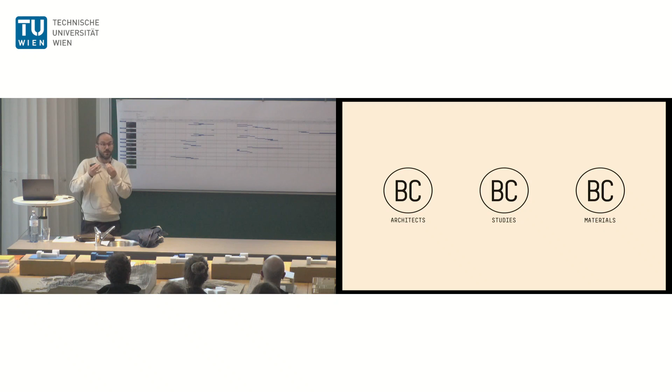Nowadays it's actually 3 practices, 3 companies, 3 legally different entities that we needed to create in order to practice architecture the way we wanted. Currently we have 15 to 20 persons working at BC Architects and Studies. BC Architects is an architecture office specialized in bio-sourced, geo-sourced and urban-sourced materials - circular building. BC Studies is a non-profit organization where we do projects abroad, non-profit projects, and organize workshops to experiment, learn, and teach about sustainable solutions. BC Materials is a cooperative that doesn't sell services, but sells building materials made of earth, mostly coming from excavations from the cities.

I'll start by explaining our vision of architecture. I think it's clear that there's nothing really new in what we're doing - it's actually looking back at how we used to build. It's always been common sense to work with scarcity, with a lack of materials, because it was complicated to transport, so working with what's around you was normal, and we're going back to that.

I like to illustrate this with an example: the vernacular architecture from Flanders, this specific region in Belgium. This specific barn was built by a farmer using the wattle and daub technique - a wooden frame in oak filled with earth mixed with straw, built next to his land where there was cultivation.

This specific farm was disassembled a second time when it wasn't usable anymore or there was no possibility to grow more. It was disassembled two times, and then even a third time to go to an open-air museum called Bokrijk in Flanders for the World Expo of '58. So three times in a row this wooden oak structure, which was super strong, was disassembled.

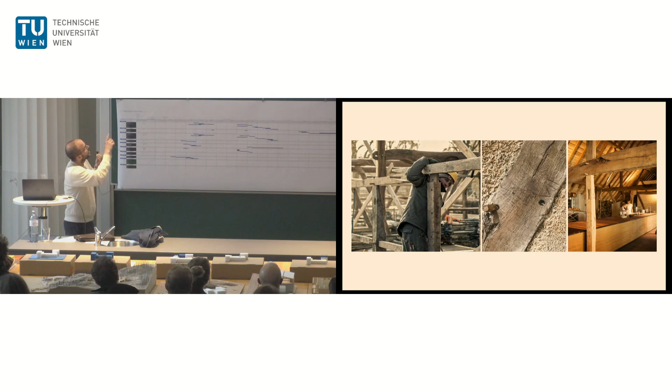The earth infill was just thrown away in the neighborhood - it was actually compostable, no waste in it - but the valuable elements, the oak beams, were reused. You see it here well because we disassembled it as a BC Architects, Studies and Materials project to refurbish this barn in the open-air museum, transforming it for this fourth life into a bakery. All the beams are numbered and attached by this kind of pin connection. For us it was interesting to see there's nothing new - this open frame structure, then refilling it.

This time we didn't fill it with earth anymore, but with hempcrete, because we needed a volume that was insulated, where you could keep the heat better. I like this example because it shows that again, it's not really new.

So with BC, what we try to do is first to think about the project. Is this really necessary to build? To say no to a project is sometimes the most sustainable thing you can do, because then you don't build, you don't need any materials. Then of course you look at sharing, reusing, and renovating. And if you want to build, then you build through geo-sourced, bio-sourced, or what we call urban-sourced reuse of materials. These are the principles we try to apply on every project proposal we receive.

And how did we start? Well, it was more than 10 years ago, 15 now I think, with my 3 best friends who are the other co-founders of BC. We were studying and received this great opportunity to go to Burundi just after graduating, with the idea that we would manage to build something finally, a library. So it was quite a project of a certain scale.

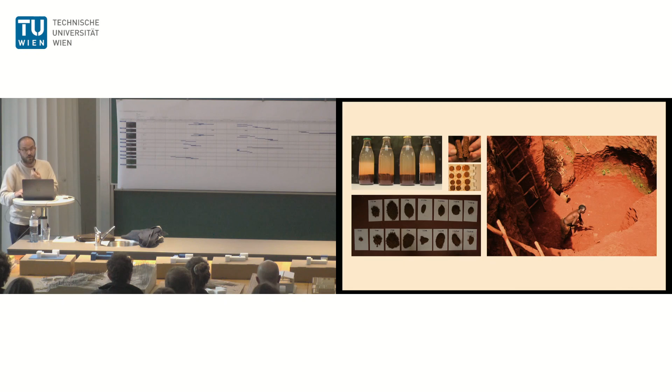This is how we discovered the work of CRAterre in France, where I later studied in a postmaster. We discovered there isn't only millennia of knowledge about earth and construction, but also a lot of modern science and construction literature about how to reformulate and make earth mixtures better and more durable.

The crazy thing about this project is that it was done in a completely different way than a project we'd do in Belgium. It was done with a lot of trust, because we had no building permit, no general contractor, no tendering, no contract - everything was done on trust. We had a client, but we also had the money, so we were also a bit part of being the client. I think no one was very clear on their role, but everyone had the same goal: to make sure this building was done well.

And then after this project, we discovered that we didn't teach anything. We were like super young architects, but we learned so much from this experience. And in a very naive way, we took it back, and we went back to Belgium with it, and we started to try to apply those principles also on our projects in Belgium.

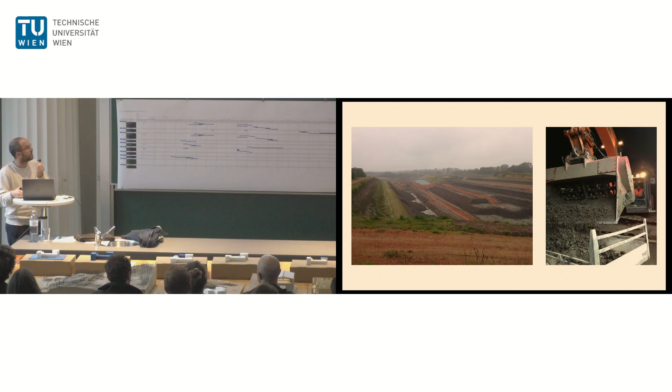So we went a bit further. We went to visit different quarries in order to find resources to make bricks. And then we started to test them, to make prototypes, to convince everyone that it would work.

Again, it was complicated to do all this prototyping or ask for extra money to do that, so we organized workshops in order to gain some time and extra money to make all those researches. We had to prototype because people were not really sure that it would work.

On earth masonry or any earth techniques, you don't have norms in Belgium. We're using the German norms, the DIN norms. Sometimes we can use them, but most of the time they are not usable in Belgium. So we had to prove that it was working.

And then in order to make blocks and to do this insulation in hempcrete, we had to organize workshops. It was a bit like a win-win situation, because in Burundi, we could hire 60 people to dig and make bricks. Here it was not possible.

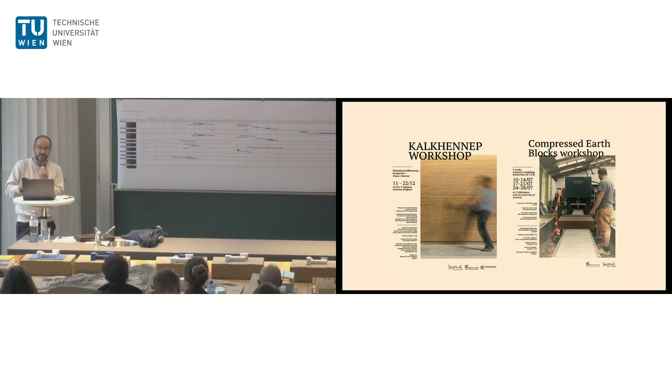So here we created this win-win situation where people would come to help us by participating in the construction site, and at the same time we would learn together the principles about earth construction and this new type of material. It was very interesting, because then you create a community, something that we also had in Burundi. This community was present, and you start to feel that by creating this workshop, you also make a community of people interested in making change, making an impact into architecture.

And so this is how we did our first mass production - not really mass, but a production of 20,000 blocks in situ - that we produced, not anymore with a hand press like we had in Burundi. By the way, if you go on YouTube, you can see videos of how we made the bricks and materials in Burundi, but also specifically for this project.

So we evolved a little bit there. We had these electric machines, hydraulic presses, in order to make better bricks, but to create them on site during these workshops. I will not show the video, but I invite you to have a look at it - it's nice to see.

But then, by doing this, we call it this type of bespoke project, tailor-made project. So we did it for our own architecture project, and started to do that also for other architects that wanted to build with the local earth. So we started to do also some consultancies.

For example, there is a project in rammed earth, like a watching tower in Flanders in Belgium for the Gouden Lineal, and we helped a few architects also to build with rammed earth, to reformulate the earth. So we gained this expertise in what we called reformulation: characterizing a certain type of local soil and then adding gravel or sand or this kind of resources that are missing in order to make building materials.

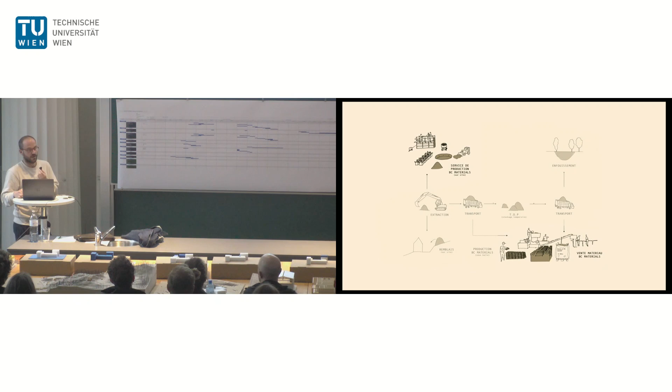And then you can ask yourself, yeah, but this earth, what is it actually? Is it not polluted? Is it usable? Well, the good thing about Brussels - and this is research we did over a few years - is that we discovered we have a lot of virgin soils that never saw the light.

For example, here on the higher ground in Brussels, in Uccle, they're digging, for example, to make a few layers of parking lots. And then they find this Brussels sand - a virgin sand that never saw the light, and that is perfectly usable.

Why isn't it used now as normal sand for making concrete? Because there's a bit of clay in it, and it's too much work to wash them. It's been done in quarries, but they don't like to do that with the sand coming from the cities.

Of course, to make bricks or materials, you need not only sand, you need a binder. In our case, we are not working with cement or lime as a binder, or any firing process to bind the material. We're using clay, raw clay, in order to bind our materials, so we need that resource too.

And here, for example, when you go a bit lower, 9 meters depth around the canal area, then you come to this Ypresian clay that we're also using as a binder. But there are different types of clays that we use to make our materials.

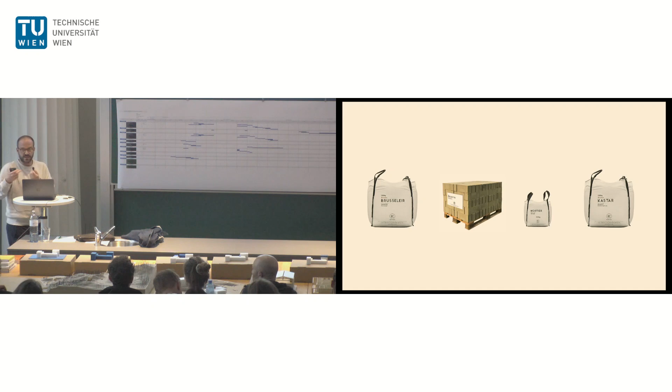Those are conditioned in typical bags ready for the contractor to use, to make it as simple as possible and to have another solution. This is the product portfolio we have for the moment: different types of blocks, different colors of plasters, and also the byproducts you need to fix earth plaster, seal it, and maintain it.

We produce that in Brussels, next to our architecture office. We have this workshop that we built in a circular way, because we're not sure we'll stay there for long. So we had to build it so we could disassemble it and reuse exactly all the components to go to another place.

As you see, you have those loading bays there. The ground worker comes and fills those 3 loading bays with the 3 resources I was explaining. Then inside we process them — sieving, mixing, all activities done with electricity, so there's no firing process.

If the transport is close, and that's what we try — we were operating in Brussels with resources from Brussels — then you have a zero carbon material, almost zero, I would say.

But of course, earth construction is something that's quite forgotten. So it's important to see that it's just as important to create a certain offer for the market. We have to educate, so we organize a lot of workshops for architects and contractors to learn how to apply these materials. We see that this is actually as important as creating good materials.

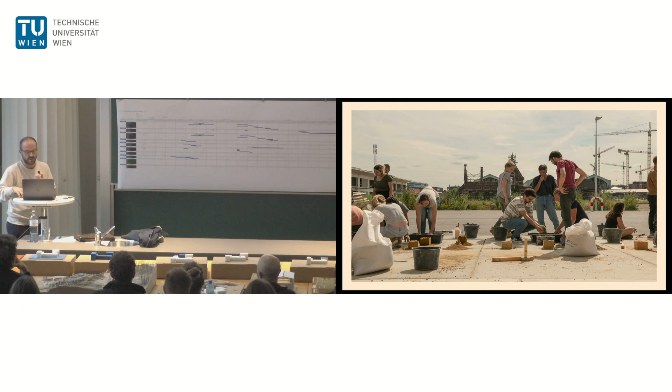I will explain also 2 projects that try to illustrate a little bit what we are doing. There's one project we did with BC Architects and Studies and Materials together with Assemble and Atelier Luma for the Luma Foundation. I think many students already went to visit it, and they're in the room now.

And then another project, a research project that we're almost finishing right now, called UTUBE — it's a BC Materials project, but more on a research basis, to see what we can do with the excavations for Metro Line 3, a new metro line coming in Brussels. This is a very interesting project for us, because it helped us understand the potential of earth in our growing market.

In Brussels we'll have a new metro line coming, so there will be not 2 million tons of earth excavated next year, but probably double that. The clients asked us to look at how we could think of revalorizing these kinds of soils coming from the excavation in order to make building materials.

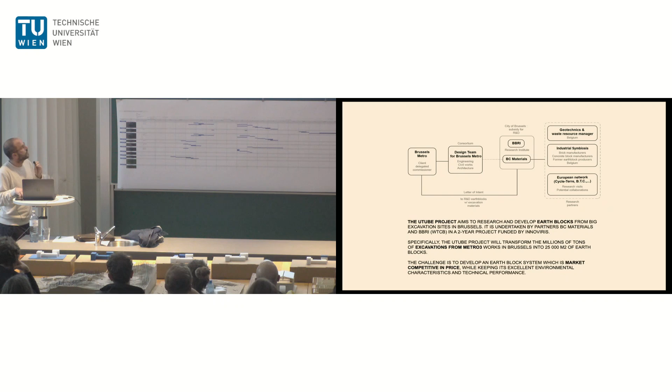The first thing we did for this project was to look at how they're going to be excavating the earth for this construction site. We quickly saw that reusing the earth coming from the tunnels would be difficult, because in order to drill the tunnels they have to pump a certain additive that is actually clay, called bentonite. This pollutes — not really in the bad sense — but it changes the properties, characteristics, and granularity of the earth, making it more complicated for us to reuse the earth coming from the tunnels.

It's also full of moisture and water, so we discovered it was easier to use the earth from the digging of the stations, because that's another way of digging and taking the earth from the soil. But still, there's a lot of potential in that earth.

Then we started to characterize it a bit, the same tests we did in Burundi but at the next level. Together with the technical institute and the labs, we characterized all the different places where they would excavate, to prepare ourselves for the big excavations and know: okay, here we have this type of soil, if we mix it with this, we can get this mixture, and then it can make this type of brick, for example. So we collected samples from all the different metro stations that will be dug in the coming years.

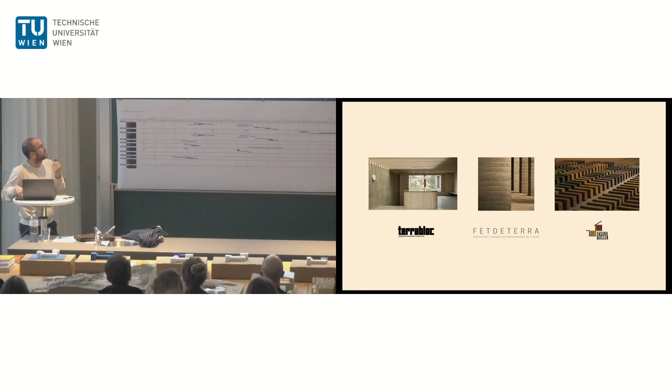You see the color is different, and the properties are also different. But what we quickly discovered is that many of the fired brick factories in Belgium are actually already producing earth blocks - so for them it's nothing new. Before going into the kiln to be burned, they're producing unfired clay blocks at a very high production scale. So we saw there is actually a lot of potential.

The only thing left was to work on the mix and figure out how to commercialize that. So we went visiting almost all the factories you could imagine in Belgium to see what the possibilities are and how open they are to working with us, because that's another challenge when you arrive as a young entrepreneur architect saying, look, we'd like to make low carbon blocks with excavation material from the subway in Brussels.

They look at you and they say, yeah, sure. So that's also part of the work, to be convincing and to show that there is something there.

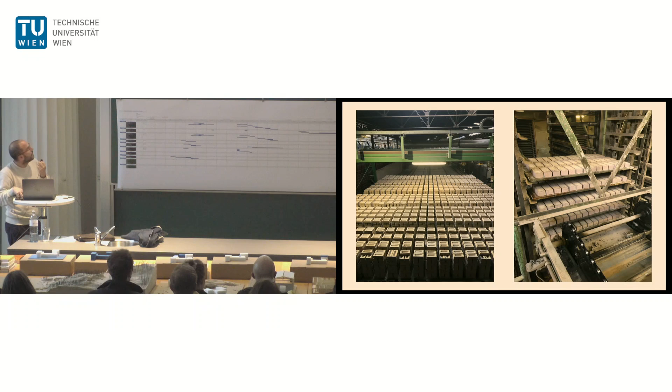That was amazing to see, because the difference in production is crazy. I was explaining the 8 tons a day with 2 people. We went visiting factories where they produce around 150 tons with 1.5 people for 1 hour of work. So the scale is completely different, and then you can start to think about

making the bricks more affordable and actually being able to reach more people. This one is also interesting, because it's a concrete block factory, not a fired block factory, and they have very interesting machinery. The system we had used compressing, well, they have a vibro-compressing machine, and they're also perfectly able to be used and to think with. So now we started a collaboration with two companies, one making molded earth blocks like on the previous slide, and this one making compressed earth blocks.

But of course you're losing a little bit of this hyper-locality, losing also the fact of being completely CO2 neutral, because we have to bring the earth there, and then bring back the finished materials a bit further. So that was a very important point in choosing which factory we wanted to work with: how well connected are they to different types of transport. Here, for example, they're close to the water, to the canal, and that changes a lot your result on the life cycle analysis, on the carbon footprint of your materials.

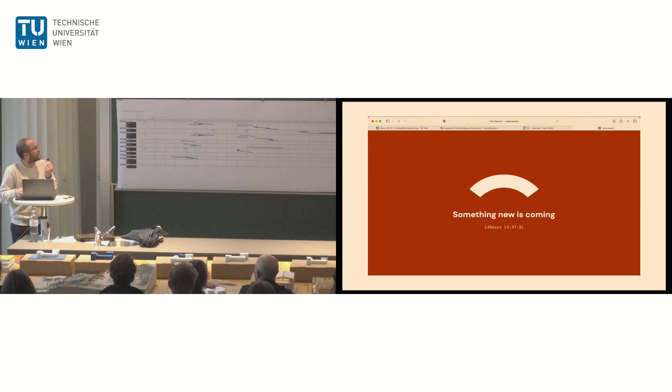So this, and I will finish now with this project. I hope I still have a few minutes.

So this previous project, this research project, led us to think about how to make earth affordable, to sell it to more people or to bring it to more people. It's not about selling, it's about actually bringing it, because our BC Materials is a cooperative enterprise, and in the status of our enterprise we wrote that our mission is to bring earth construction from a niche market to a growing market.

So we felt that to create impact and reach more people, we had to become a bit more mainstream, I would say, or to also lower the price to make it more affordable, and not to be only for the lucky ones.

We were talking today during the juries that, for example, rammed earth is a very, very interesting material, but it embraces a lot of craftsmanship, and so in countries where labor is expensive it costs a lot of money. Most of our clients that can afford rammed earth are super wealthy. It's always funny to see that this earth can be used to build in Burundi for people who earn €1 a day, but then on the other hand you have earth sold for 1,500 to 2,000 euros per square meter. But that's okay, I think it's important to see that.

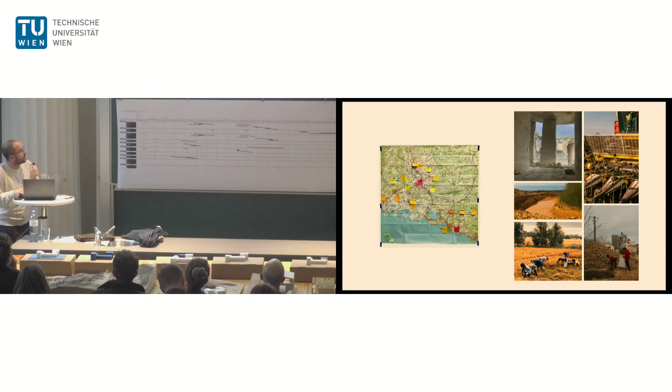For example, you see above, we went visiting different stone quarries, sand quarries where they have this waste. Most of the time in sand quarries they wash the sand, and then you have the waste of the sand, which is actually a clay muddy earth that has been dried and not used - so that was interesting to use as clay. But also the rice straw and the sunflower.

What was nice with this project is that Assemble Studio was in the UK, BC was in Belgium, based in Brussels. We had to work together and find a way to do it, so we worked a lot through residencies. We would go there for a week, two weeks, designing together, prototyping together, and then building small exhibitions in order to move forward. Those intense moments where you're all together, feeling a bit like a community, were super important to work together.

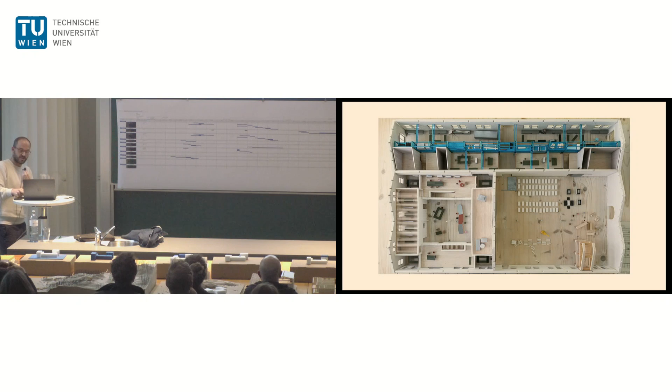And so it results in the end in this plan. You have the existing shed divided into 3 blocks, where above you have the longitudinal workshop room, and down you have more the ateliers. The models were also super impressive in order to take decisions and try things out - a lot of models on different scales, going to prototyping in order to make decisions and see what would be doable or not.

You see the construction site of the wooden element, inside the construction site - and by the way, in two weeks the official opening of the project is happening.

And here you see the production of those bio-based materials with the rice straw, making acoustical panels. The whole existing stone building was insulated from the inside with rice straw, placed by local people there, an association.

And then here the different prototypes of the rammed earth. BC Materials was on a mission to work next to BC Architects and Studies to also create mineral materials. So we actually did some rammed earth, the mortar for the rammed earth, compressed earth blocks, and the mortar for the compressed earth blocks, plaster, an acoustical plaster and a base plaster - all with resources coming from around.

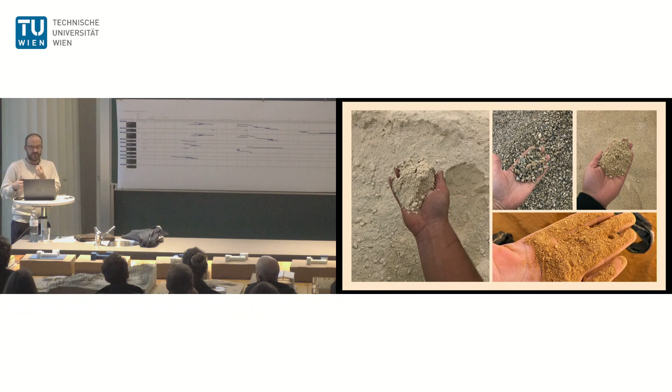One of the main resources that was super interesting to work with was the stone dust from the quarry of Saragon, because there they have this really beautiful quarry that looks like a cathedral, where they cut this white stone, and on the floor you had a lot of this stone dust. This became the base ingredient of everything, and that's why you have this white color in the rammed earth and in the bricks - but it's actually not really common for rammed earth and compressed earth blocks.

Of course, we had to do a lot of testing to prove that those materials were good. The good thing in France is that you have norms about rammed earth and compressed earth blocks that we could follow to prove to the engineers and control bureau that it was up to standard and strong enough, even though it was unconventional, so the risk wasn't so great.

We were also super happy to work with the best contractors. For the rammed earth, we worked together with Atelier Cara from France, which was great. In the south of France especially, there's a lot of capacity and a lot of people who are very good at earth construction.

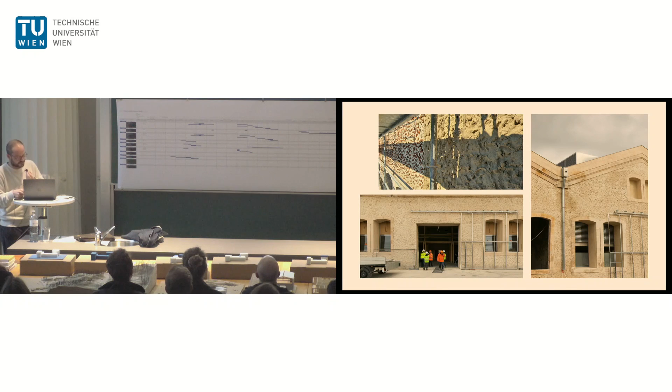Here you see the reuse of the clay tiles from the roof, which were reused for the floor, as you see in the samples on the left, and also for the facade to create this crunchy plaster around the whole building, with these pieces of crushed tile, and these beautiful cross-section tiles that became the terrazzo floor.

Here you see the production of the blocks. BC Materials didn't produce the bricks and rammed earth themselves, which is something we could have done by bringing our own machinery. Instead, we trained a general contractor specialized in concrete to mix the rammed earth mix themselves, which we had pre-designed and reformulated.

Here you see the inside, with this whitish color, the plaster also applied on the straw bales inside, so you don't see the straw bales anymore.

We also researched something really interesting, though the research ended up not being used, although I think now it's used in one of the blocks. We tried to make finishing earth plaster with algae as a binder. We discovered that the algae, spirulina, doesn't just work for coloring, but also acts like clay to bind sand together. That was really interesting, giving a nice color, although it reacts completely with UV, so it changes color.

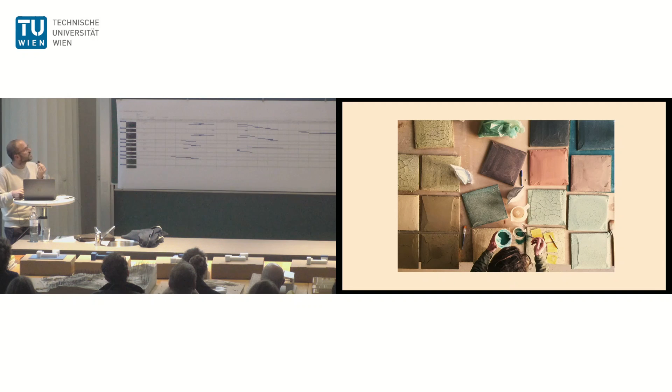But when you have an artistic client, they like that too, so it was okay. What didn't work well was the smell - when it gets wet again, it would start to smell. So we stopped the research for a bit, but now we've found a way to get rid of the smell, so it's used as plaster in a few places.

Here's the construction site, spraying the earth inside. It was super nice to work with all those local resources, and also with all those local, super skilled contractors, and that's what makes this project very interesting, I think - it's on a human scale.

There was a lot of exchange. We were also lucky to organize a series of workshops during construction - not to lower the price or get free labor, absolutely not, but to exchange knowledge and show that these unconventional materials have a lot of future in building. I think we reached around 100 to 200 people through the different workshops, one on fibers, one on earth, and one on straw bales.

Here you see the fiber workshop, and that's it.

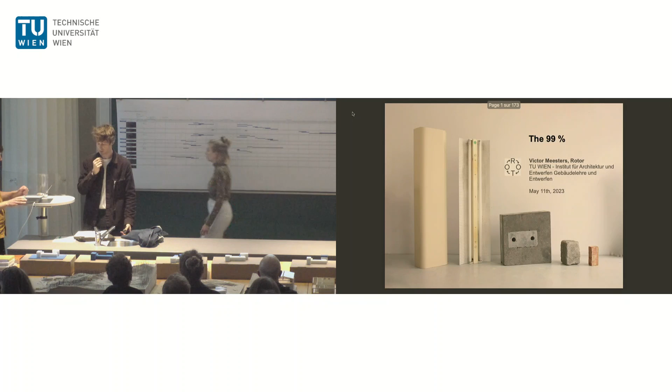I'll briefly introduce Rotor, which is actually two departments: Rotor itself, plus Rotor Deconstruction, founded later. Rotor as an association was founded in 2005 in Brussels, and since then has debated questions related to resources, waste and obsolescence in the building sector through applied research projects, exhibitions, conferences, and impressive publications. Some are here up front, so please take a view if you have time.

In 2013, I believe, you curated the Oslo Architectural Triennale. Then in 2014, Rotor Deconstruction was opened, which concentrates more on actual building audits, looking at existing buildings and auditing them to reevaluate components, then rework these components and take care of all the logistical issues. We'll be hearing all of this later on.

A couple of years ago, I was able to travel with my students to see you, Victor, in Brussels, to actually see what this meant in reality—large storage areas, the whole logistics of maintaining and deconstructing, and how that truly works. I think that's very valuable for all of us here today to really see how that works.

I'll also briefly introduce you, Victor, because you've been heavily involved in FCRBE, which was founded a couple of years ago, 2019, which I think you will probably show us.

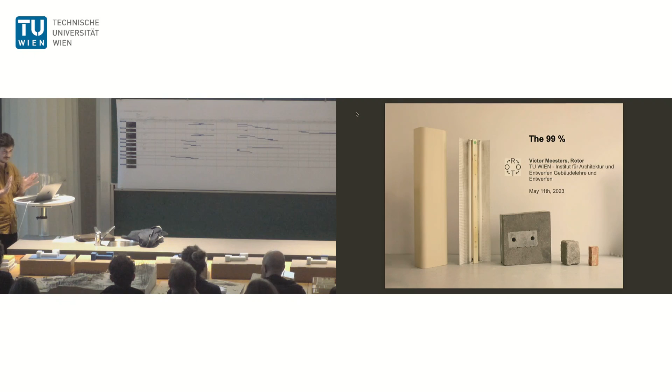There's a nice image, voilà. So yes, I joined Rotor 10 years ago. After my studies—I studied landscape architecture and architecture in Paris—I ran a small association called Sixième Continent, dismantling exhibitions and trying to build something with reclaimed elements. Then I met Rotor 10 years ago because I wanted to do an inventory of all the reuse dealers in France, and it took me almost 10 years to achieve this goal. So now I'm at a cross-section of my life because I checked this box.

Tonight I'm going to give you an insight into what we are doing at Rotor. It's not all the projects—there won't be the exhibitions that some of you may know us for, though as Gordon says there are some books about these exhibitions. But I will try to give a really pragmatic talk about how to reclaim building elements.

Gordon already said everything about Rotor, and most students know it. We are a team of 30 people—this picture was taken a few years ago—based in Brussels. And me, I'm always like the black duck, I don't know if we can translate this in English, because I'm here in the middle of the picture, but in fact I wasn't here. It's like a collage, because I'm always in Paris, steering a small office in Paris for Rotor.

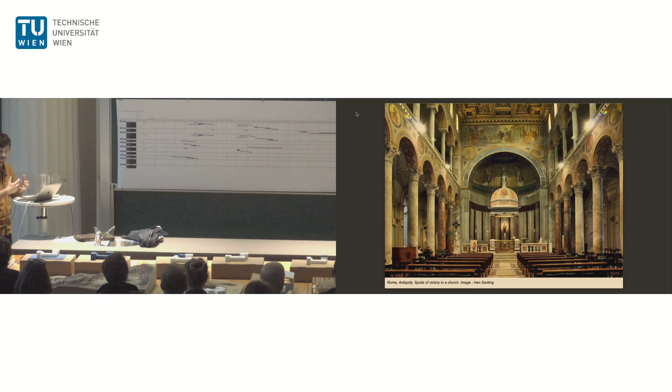We found through archaeological studies that there was an existing market for second-hand materials during the Roman Empire, like selling tegula and imbrex, the tiles on the roof. Also in Pompeii, we found that much of the marble bar - the club of that time - was made from the reuse of marble tiles from the nearby palazzo. It's called a thermopolium.

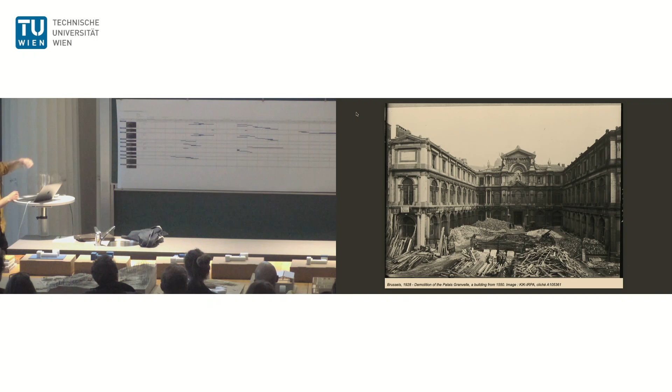This is an image of a demolition site in Brussels in 1928. It looked a bit like a recycling demolition site with piles of materials well stored - piles of cobblestones, wood - except if you look carefully on this billboard, you'll see 'material to sell on site,' proving that less than 100 years ago we were still selling materials on site, and all materials were dismantled to be carefully sold.

So there are a few reasons. One of them is the evolution of tools. During the time of Achille Picard, they were using hand tools. Then with the two wars, we got tools that made it easier and faster to knock down a building. So you earn money if you demolish quicker nowadays, or if you build quicker.

Also the cost of labor rose over time. Deconstruction is labor intensive, maybe like 7 times more than demolition practice. So these reasons changed the demolition practice to the ones I showed before.

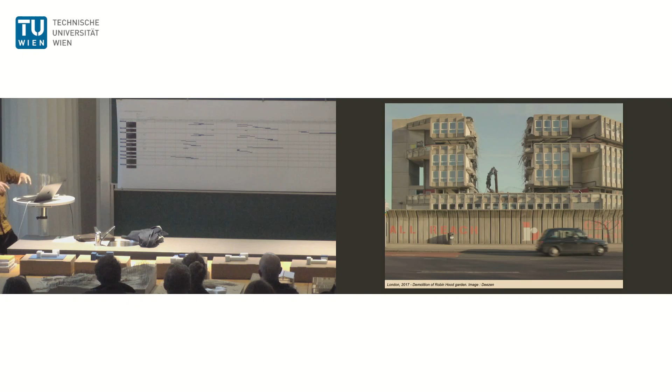And then after the 1970s, we changed our demolition practice to recycling. This is a demolition site - maybe you know this famous building in London that was knocked down in 2017. We start to strip out the building to sort the materials and crush the concrete to make new raw material.

So when we talk about recycling, we're talking about crushing materials or melting materials. And we all know how disappointing this practice could be - a great loss of value, or great loss of energy embedded in this element.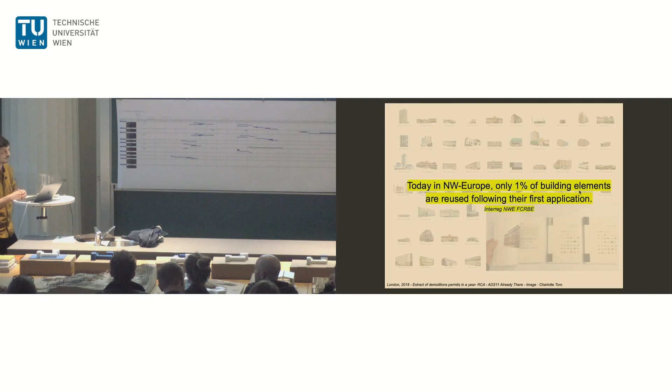So the question is how to facilitate the circulation of reclaimed building elements. Now I'm going to propose a small exercise to warm up a bit.

It's an exercise I took from Dennis Meadows - you maybe all know this guy who wrote the Limits to Growth report in the 1970s. It's an exercise to interrogate our habits. So please cross your arms like that.

And look which hand is on top. Now uncross your arms and try to cross in the other way, in reverse. How do you feel? Good? Difficult? No? Not natural?

Yeah, it's hard, I know. It's hard to change your habit. And it's the kind of feeling you can have when you start to build with second-hand materials in a world where everything is made for new materials. But trust me, if you try every day to change your hands like that, to cross them the other way, you get used to it. So this is the good lesson. At Rotor, we try to make tools to help you not have a nausea each time you change your habit and build in a different way.

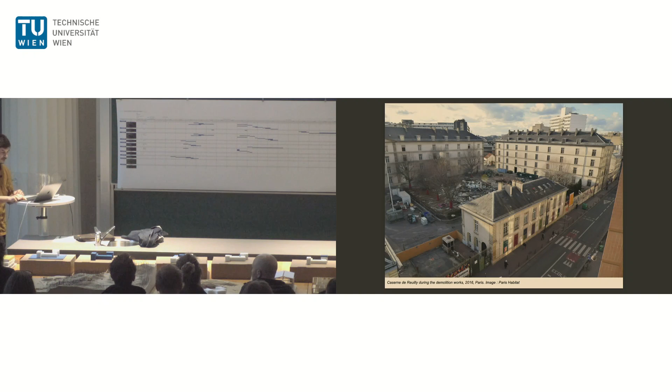So I'm going to present a few tools at a few critical points of the project. The first question when you want to reuse building elements is about the assessment, how to evaluate the potential of reuse. You have a site like this one in Paris, a former military camp transformed by Paris Habitat into social housing. You want to evaluate the potential of reuse on site for these building elements.

So the first thing is to do a listing, like the students did here, a listing of all the building elements. But an element that can be dismantled is not necessarily an element that can be reused. There are more criteria to take into account.

Like for instance, is there pollution, toxicity, like lead or asbestos, the quantity of materials - if it's only 2 square meters, it's not going to be really interesting. The state of wear, is it in good condition? The price on the market versus the price new. Is there an existing reuse actor? The phasing of the building site, if you have to remove it quickly, the accessibility. So all these criteria are required to evaluate the potential of a reuse element.

There's no reuse actor, meaning no market or business market for this element, but there's a large quantity and good quality of materials, so we can do something tailor-made on site, for example. And then the anecdotic category. This is like an image of the information we need to communicate to the actors of the project, because as designers, if we don't show the information, we cannot manipulate it.

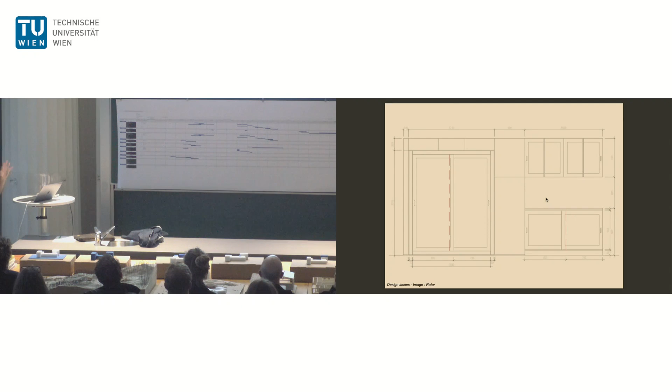The question of renovating this cupboard - the first question is about the surface treatment, how to sand it, how to treat it. So we did some processing tests. Then the design, because they are not square, there is bending, etc. So you need a design that accepts this element in new furniture. And we did some mock-ups that the architect put in his project.

Same thing for this toilet partition. It's a kind of Trespa panel, really high quality - it resists high temperatures and numerous chemical products, so it's really hard, with a really long lifespan. But the environmental impact is really high for this kind of material, so you have to reuse it. In fact, it's a good board for carpentry, so we designed a stool.

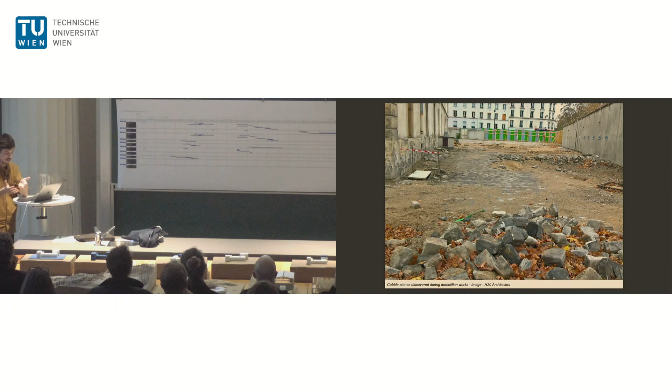So we upcycle, as we say - we give more value in furniture than in a panel. With the CNC, we cut these panels and create furniture for the cafeteria. Everywhere in Paris, under the roads, there are these kinds of cobblestones. So we discovered that the city of Paris has a platform where they cut and treat these cobblestones.

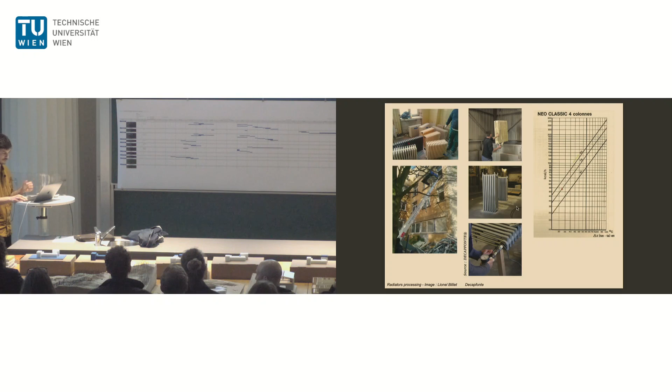So they were able to cut them and have a plain road for pedestrians and a rounded one for the garden. Same for the cast iron radiators. There were 300 pieces, and there's a reuse market for it with a high level of service and a warranty of 10 years. We were astonished discovering these traders, and then they put them again in the project with the new hardware stuff. It could be a nice story, like everything is reused.

But in fact, really few of what I showed you were reclaimed because of the organization on site. For example, these sanitary items were damaged during the deconstruction, so we cannot reuse them. This lamp was meant to be transformed with an LED system, but the engineer didn't accept it because he couldn't calculate the reflection of light of the abat-jour.

This railing was dismantled to be transformed into urban furniture, but the company sent this railing to recycling twice, maybe to get a bit of money. So we understand there was a lot of steps or organization on site that we didn't take into account, which made reuse of building elements impossible, like these 4,000 square meters of wooden floor that were polluted by the lead depollution operation.

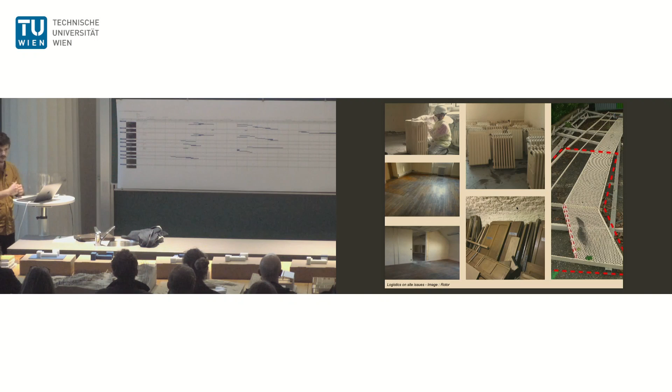So we came to this question of logistics. Reusing building elements is not only about assessing and transforming it, designing something—it's also about logistics. So how do you extract building elements to put them on a truck?

And so we did the same, and we built our castle in Brussels, opening a deconstruction company to get hands-on on site. We started accepting missions just before demolition, coming in and taking out some building elements—for instance, these ceramic tiles.

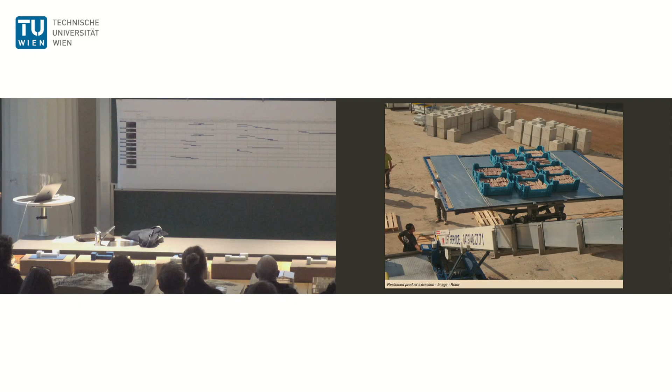So we needed to test some dismounting practices. Here you need to crush the first row to have access to the others. Some of them break, so maybe you have 30% loss—you know you cannot reclaim 100% of materials. Then you're faced with how to extract the materials, thinking about the right containers for workers to extract them by the door or the windows, etc.

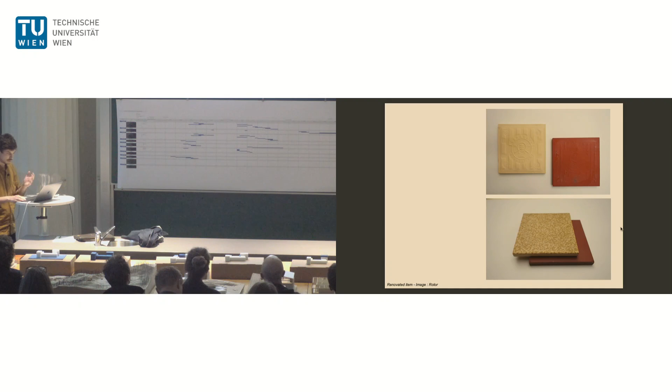Then you have the material coming out like that, so you cannot sell these tiles with the mortar still on them. You need to try processing by hand, but it's too long. So with vinegar, pouring in 20% vinegar for a week, you get this new ceramic tile coming out from the treatment.

We found the culture embedded in this material, the catalog of that time, to know which pattern you can do with it. We framed the state of wear into categories A, B, and C—A without scratches, B with a maximum of 5 millimeters. It's like your phone on a second-hand website, you know, you can buy different grades.

And then we started to sell this element, and some designers bought it for their projects. We also collect sanitary items and start processing and selling them.

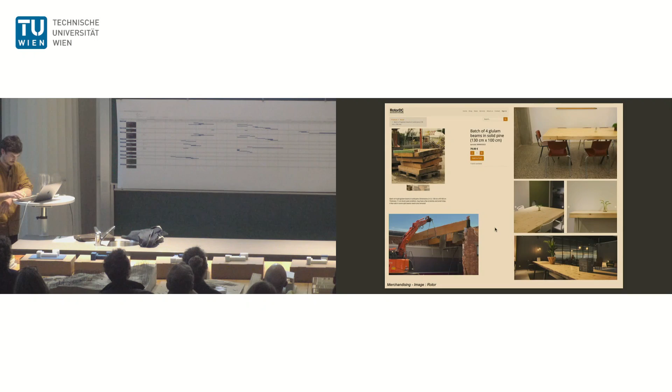We also collect contemporary building elements, like this radiator cover made of plywood that all the designers in Brussels really love, because you can transform it in many ways. We collect glulam beam structures to make furniture. And then we had a first catalog of building elements to work with second-hand building materials.

That was, I think, another step in our practice, to have access to this catalog. And we opened a shop to the public in Brussels—so you're welcome if you want to make gifts for Christmas for your family. We have nice lamps.

And Rotor Deconstruction tries to be as close as possible to the services of a new product, to make it easy for everybody. So this is a challenge, and something in common with what Nicolas said before, trying to reach the same services.

For instance, we are now proposing to sell products from other demolition companies, not just from our own building sites, as a depot vente. So you bring the materials, and if we sell it, you get half of the sale. It means we share the risk of the money invested in the workers, because you only get money back when you sell the materials, so you need to invest a lot for all the time of labor.

So we discovered that we skip this step during the production of material that has a really heavy environmental impact, and also the waste treatment. We also discovered that we create a lot of jobs doing that, and we conserve the culture of the materials.

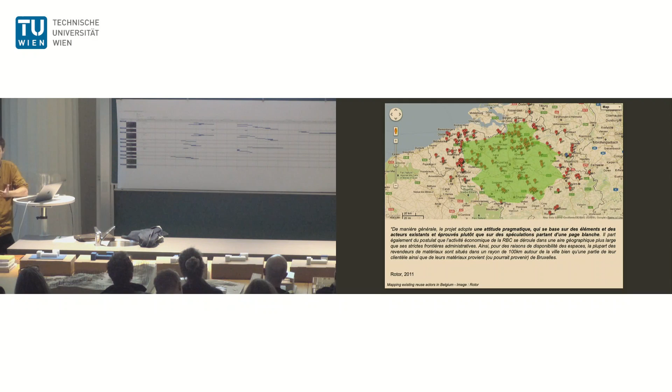We took a pragmatic approach, and decided to drive one hour by car from Brussels to look in the countryside, where the land is cheaper than in the city, to see if there were people stocking materials. And in fact, this kind of company exists everywhere in northwestern Europe, and I'm sure there is in Austria too, selling second-hand materials.

There are various profiles: antiquity dealers, traders of cast iron radiators, demolition companies that stock their elements, startups from a new generation. And most of them are not the green revolution 2.0 that you'd expect.

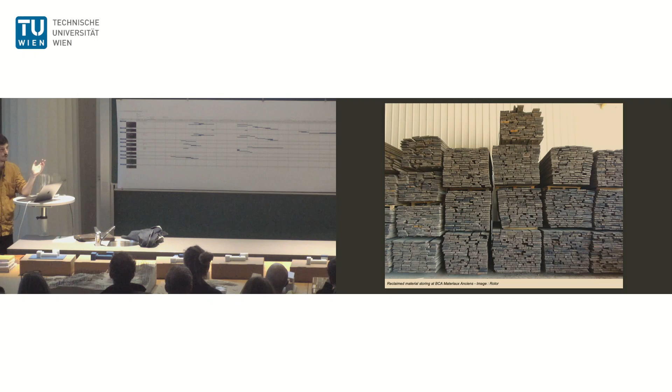It's more like this one in France, 'authenticité, caractère' - interested more in the patina and the story of Marie Antoinette than the circularity. But he's got a huge catalog of second-hand materials, like this board that he reclaimed from various places. He has a stock, so you can design your project and be sure that six months later, there are going to be some wooden boards. Maybe not the same one you saw in the stock, but there will be some.

He also offers services to treat the wooden boards, and sells some of them in London, in Cambridge, to 6A Architects for a new facade of dormitories, proving there's no problem adding old or antique materials into a contemporary project, and it fits perfectly with the design.

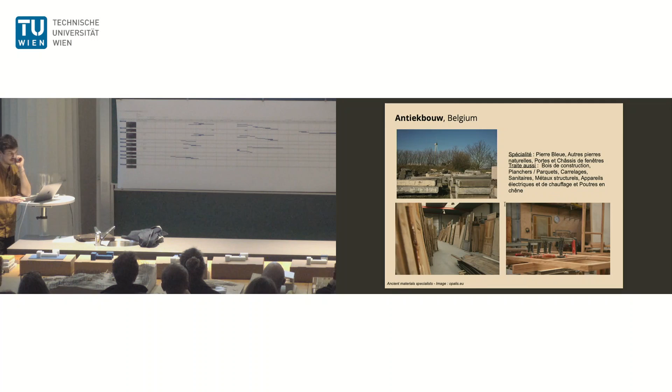So we discovered there were brick specialists selling second-hand bricks for houses, window specialists selling second-hand double, triple, or simple glazing, and even an antiquity dealer able to build the frames of simple glazing windows for a really complicated building project - a building of the European Council.

It was a kind of public tendering, really intense. The trick here is to dissociate the constraint: the insulation is inside, where our ministers go every month, and the facade is just simple glazing for the rain and wind. So it's kind of an inspiration for the passive house, to reclaim simple glazing in this kind of device.

So we had a second catalog of materials, broader, with a lot of companies everywhere. There isn't all the materials you want, but you can start with that - you can start with the state of the art to change your practice.

So we decided to do an online directory called opalis.eu, to give access to information about these reuse dealers. It's not an online marketplace, it's just a directory, and we also give information about projects that have already implemented reclaimed building elements.

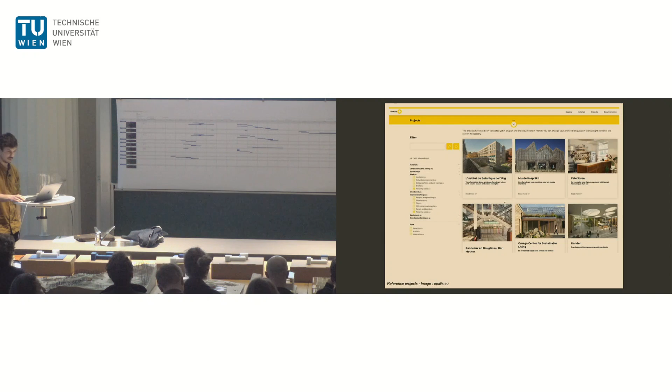And we went a bit further with this FCRBE project, which means facilitating the circulation of reclaimed building elements. It's a European funded project, and we developed material sheets about the most common materials found on the market, guides to help extract building materials, and manuals to implement building materials with all the tendering, public tendering, all these Rubik's cubes of spaghetti stuff.

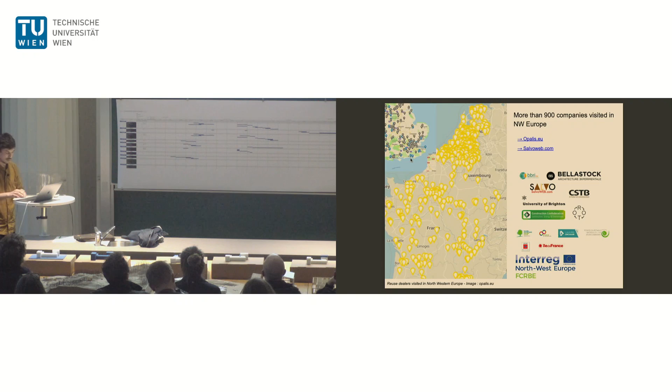So there's this website for Northwestern Europe called opalis.eu, and SalvoWeb for the UK. And yeah, I invite you to do yours in Austria.

The last chapter is about designing. Of course, we'd like to show a bit of the projects that implement and test this practice, so I'll give you a few lessons through different projects.

For instance, this first project's lesson is about consulting the sector to formulate reuse objectives. We've got this demolition site, an old building in Strasbourg from the beginning of the 20th century, full of building elements that you can find on Opalis. So we did this inventory and reclamation dismantling test.

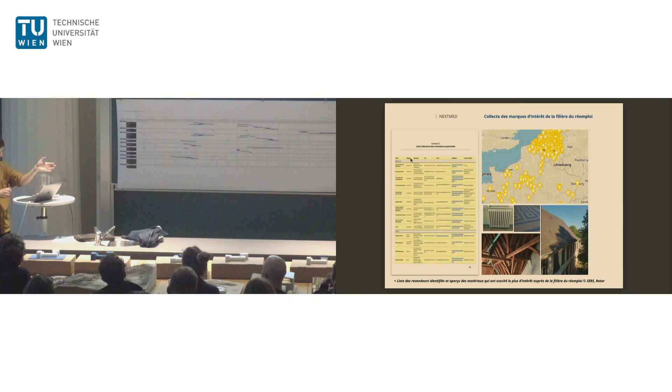But the question is, when you have to write the specification for your tender, which element are you going to put in it? Which one are you sure is going to be reclaimed, and what percentage? So to do this, we call all the reuse actors. We send this inventory to them to collect their marks of interest.

Are you interested in taking this tile, this beam, etc.? With their answers, we can have a reuse rate in our specification and say we oblige the demolition company to reclaim 80% of the radiators, 50% of the wood, etc. That's really helpful, because otherwise you only write 'we'd like to do some reuse, but do the best effort,' and they say 'I did my best effort and there is 0%.'

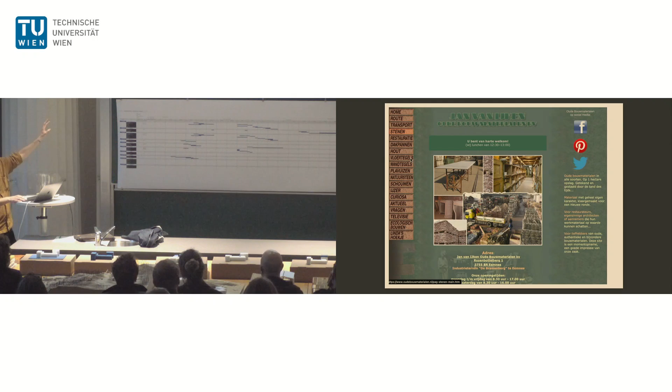Second lesson: adding new elements to make it work. When you reclaim or reuse a building element, you always need to add a small piece of something new to make it work. So you'll understand - this is an electronic music festival in Brussels that invited us to cover their event, to build a big roof with very little money.

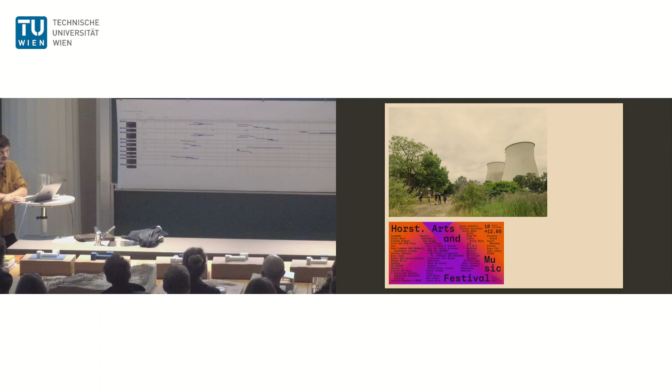So we went online to check what kind of structure we could get for nothing that could cover the space. In Normandy, there are a lot of greenhouses in France that you can buy, so we bought three of them for nothing. We sent our guys - this is like a deconstruction site on the weekend. It's kind of architecture in reverse, so you need to understand how it works and which piece you have to dismantle first.

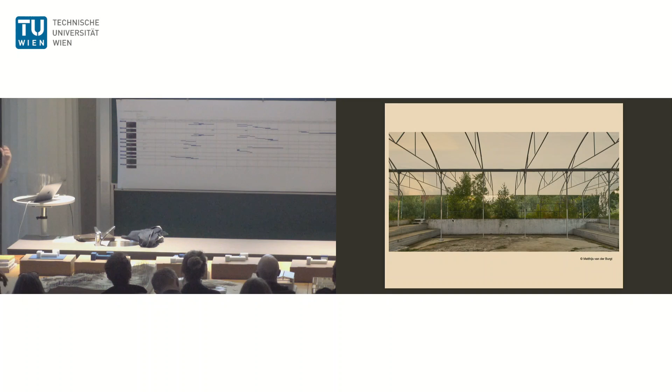You need to do some dismantling notes to remount it afterward, so you need to note the pieces. We sent the truck and installed it at the festival. We needed to add new materials to adapt to the site - the light gray pillars are the new pieces that made it possible to add this roof on the scene, and also to raise the roof a bit for the event. We needed to add this part of the pillar and also a new roof to make it work, and they could enjoy their party for the whole summer.

Another lesson: keep in touch with your network, meaning you need to constantly call or be aware of what's going on in your city, which demolition sites, who is doing what, if you want access to a lot of materials. Here we are close to the European Commission, and Antonio Parodi, the owner of this boutique, wanted to open a bookshop with the same book in 13 languages. He wanted to invest 100% of his budget in handwork and no materials - for him, reusing building materials was the way to invest in humans, not materials.

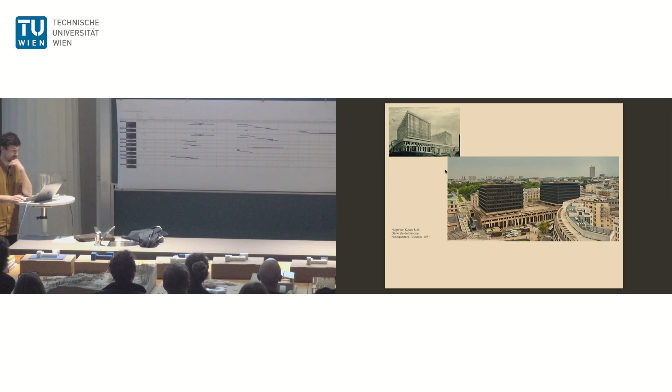So we started the project and checked what demolition sites we had access to. At that time, there was the demolition of a bank built 40 years before in Brussels, full of golden nuggets of precious materials like flame granite walls, cladding, etc. We collected a lot of elements from there.

In Ghent, there was this book tower being renovated, and they wanted to throw away some shelves, so they called us and asked if we wanted to reclaim them. We said okay, we'll come. We did some research and found out they fit perfectly to their space, tailor-made, and it was a famous designer who did the same thing in the European Commission.

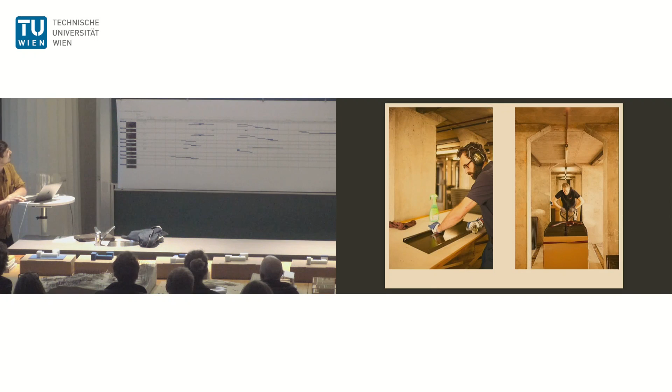In the end we asked them, what are you going to put in your renovation? They said, we don't know, because we have the perfect one that fits perfectly for your space, made by a famous designer - it's the one you gave us. So in fact, they bought back the same shelf, and we kept some of them for the project. That was the tax for ignorance.

Sorry for that. I hope it's not recorded.

We collect all these building elements, and voilà, with this insulation panel we made some bookshelves, etc. So you have 90% or almost 100% reuse elements in a shop, and you don't see that it's coming from second-hand — the floor, the lights, etc.

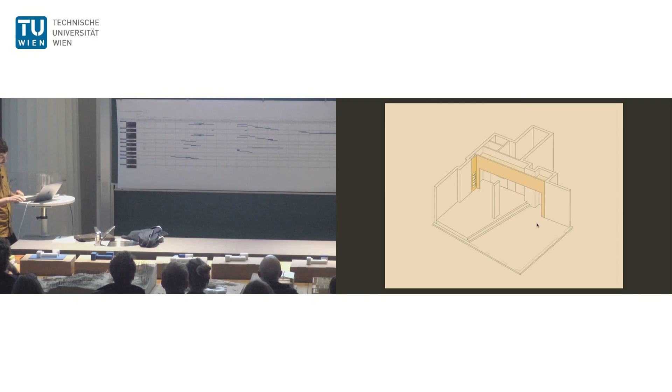We had one design project to open this wall and create this blue cave for the counter for the guy. We didn't find a wallpaper, so we thought, okay, we're going to paint it in a color because it's going to be cool like that.

At Rotor, we're really bad when we have to decide on a new material. So we checked all the blues, all kinds of blue, and we had arguments about it — no, that blue is too realist, this one is too much, etc.

One of our colleagues saved us — he went to the theater, La Monnaie, where he's a scenographer, and asked the scenography team, and they said, we have a lot of decor that we throw away. It's in the containers, but we discard it because we have too much of it, even though it's a piece of art. We asked, can we reclaim some of them and reinstall them in your shop? Yes, of course. So with a couple of bottles of champagne as a thank you, they came and installed the best wallpaper you could ever have, coming from the theater.

It's almost done, but design with flexibility is maybe one of the major lessons you have to take into account. Designing with reclaimed building elements means there is a lot of uncertainty in your project, and you need an open framework to accept this uncertainty.

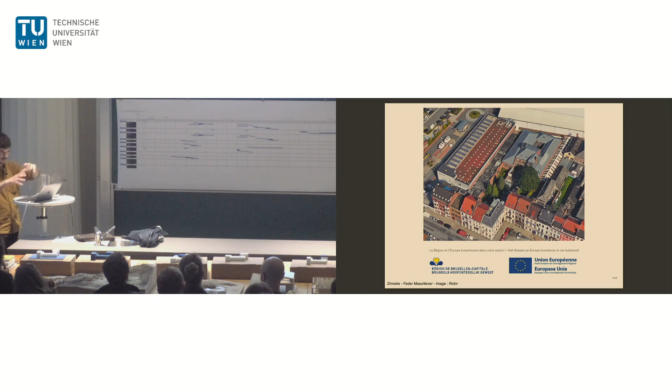Maybe many of you know this project — it's in Brussels for the non-profit organization called Zinneke, which organizes a parade in Brussels, and they needed this building for their workshop. During the renovation there was an extension of the facade, and creating a new facade means you need windows.

We met this reuse dealer of windows, who is really nice because he has a huge catalog with all the quantities and dimensions, so you can work remotely.

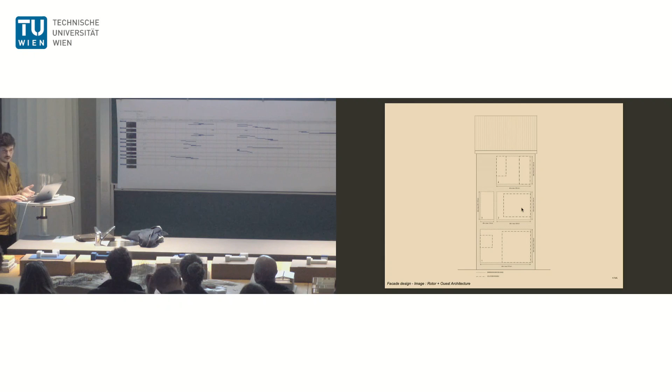We designed starting from this catalog, but the first step was to get a construction permit from the city. How could we be sure that the windows we saw in the reclamation yard would still be the same six months later, at the start of the building site? It wasn't possible, so we had to design for this flexibility and tell the city that the opening would be maximum this wide and minimum this wide — and it helps that it's a backyard facade, not facing the street. They accepted it, understanding we had no choice. That was a good lesson in framing this uncertainty — incertitude, if that's the right word in English.

The second step was the specification for the contractors, since they would buy the frames and be in charge of choosing them. We needed to frame this selection too: we said we're flexible about color — pink or blue is okay — but we want homogeneity in the batch of frames, we want energy efficiency, and we're okay accepting some small scratches, with dimensions within a certain maximum and minimum width. That was another way to describe requirements to the construction company.

When it came time to build this facade and buy the windows — this is the kind of work you have to do when reclaiming and implementing second-hand windows — we drew all the window options for different facades and presented them to the clients, saying, okay, we select that one. In the end, we built this facade with these second-hand windows.

Last lesson is quite obvious for everybody, but I wanted to show it, reveal what's already there. We are always hearing about this, but this one is kind of poetic and maybe goes beyond what we can expect.

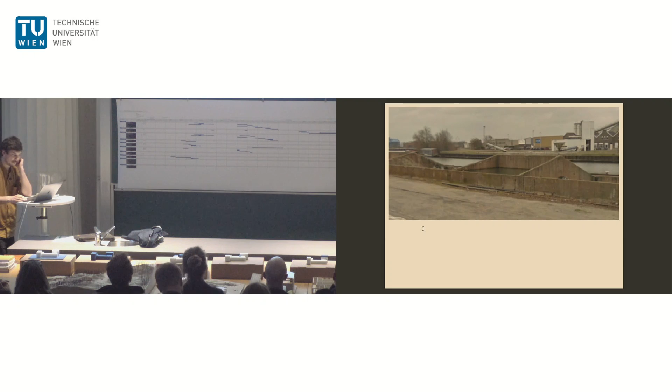And we're in Ghent, and there is this former industrial harbor, and the architect wanted to transform it to a public space, and to do so they paint everything in white, and we were invited as the 1% artistic to do something on that site.

And we say to the architect, before painting, can we go to the site and check what is already there? Because maybe there's no need to paint everything. So we came with my colleague, who is a bioengineer and a big geek of mushrooms, and he took pictures of all the mushrooms and said, this one is here because we stock this kind of material, this one here because of this climate, etc.

So, okay, there's a nice story. So we keep one of these mushrooms. And then another one, well, he likes curating exhibitions, so he says, okay, I'm going to select this graffiti because it's nice, etc. And then another one says, look at this coloration of this sanding of this concrete that reminds of the past stock of elements here. So okay, we frame here.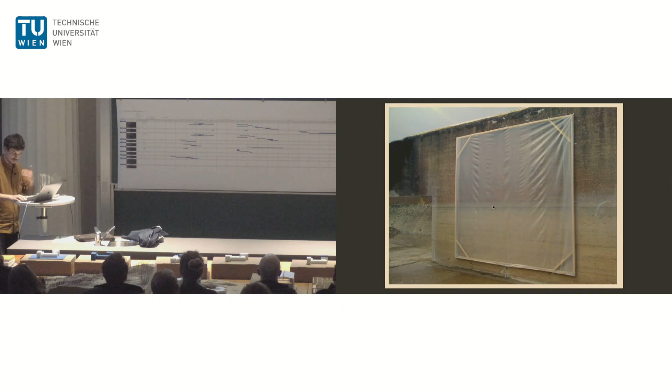And then we let the company paint everything, and instead of having a public space, they had a gallery, an art gallery. Voilà, and less painting. Merci.

I think it was incredibly inspiring for us. Yeah, I think I'm fine.

No, incredible. I mean, I thought I read a lot about your work, I've seen your work in exhibitions, I read interviews and so on, but it was very different, also seeing your energy and passion, how much you want to share and how much you want to really go from this niche into the mainstream.

And I think this is an opportunity today to somehow inspire more young architects or future architects to follow this path, I guess. In order for this to become a symposium and discussion, we would not like to start with questions from our side, but we would really like to open it first to the audience. So please don't be shy, please ask our two experts here whatever is relevant for you.

Hello. Yeah, a question maybe for you both: how much do you depend on carbon-intensive industries for your work? For example, you use the byproduct of sand, which is probably produced to create concrete. How would you think, is it possible for you to be independent of these cycles?

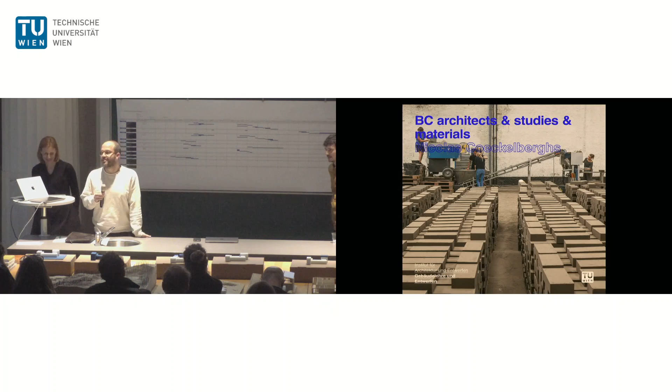Yeah, what do you mean with cargo? Yeah, carbon emission, high carbon. Yeah, yeah. Is it working? Yeah, I think it's better? Yeah, okay.

Well, in our field, I think we are absolutely not dependent, because there is plenty of earth that's been excavated, so this is, let's say, waste. And what's actually cool is that we see one of the biggest issues we have with our material, when we calculate its carbon footprint, is transport. So from the moment you transport the resources or the finished product too far, and it's quite heavy, earth brick has the same density as concrete, then it loses completely its sense. Then it's sometimes even more sustainable to use a cement brick or a fired brick that is more local than an earth brick coming from further away.

So there is this logic of working locally, which I like a lot, because then you are pushing to have more local actors working, and so you have more healthy competition, I would say. There is no competition because actually everyone is working in his own field and being connected by a network also. So I think it's even a plus point, that this fact of transport, that would limit ourselves to being carbon intensive, it helps also to be local.

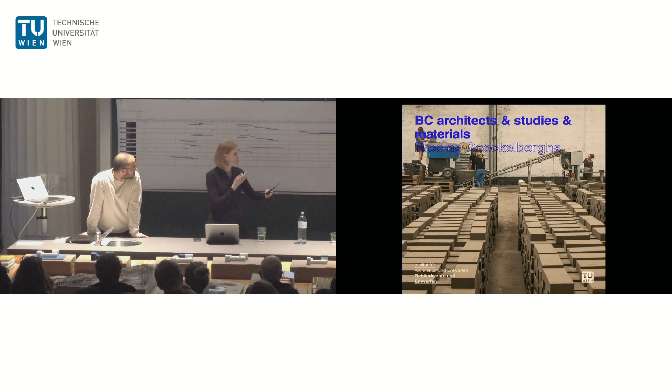Exactly in terms of transport and locality, how far from the construction site the company or material comes from - it's really important to acknowledge that while doing bricks or creating bricks, it has been historically relevant to be close to the construction site. The whole Vienna has been built by bricks from the Vienna clay, no? That was inherent in the whole idea, and I think we are forgetting about this. Of course, sometimes transport within the EU makes sense because it's not that far, but I think we really don't know.

I didn't know until I went to a quarry in Istria that the new director decided to limit the sale of the stone to the Saudis, because a certain amount of stone needs to remain in Europe. So it's this kind of strategy of the owner of a quarry that decides either this becomes a local European business or a global business, within which it's even useless to address the idea of CO2 for the transport. I think what is extremely interesting, as you showed in your lecture, is that we are going back to where it was normally - that we need to primarily build with materials that are in abundance around where we are, I guess, no?

So maybe from the transport, going back to the public, I wanted to ask another question because it has been coming in and out for a long time - because of this Brussels agenda and all these public buildings, EU public buildings, it's the standard and the norms that you actually opened up also with DIN standard, French standards. What did you learn within the Luma atelier? What did you learn with all the previous projects? How do you approach it? Because once you want to go from niche to mainstream, this is one of the key moments you need to address in order to become mainstream.

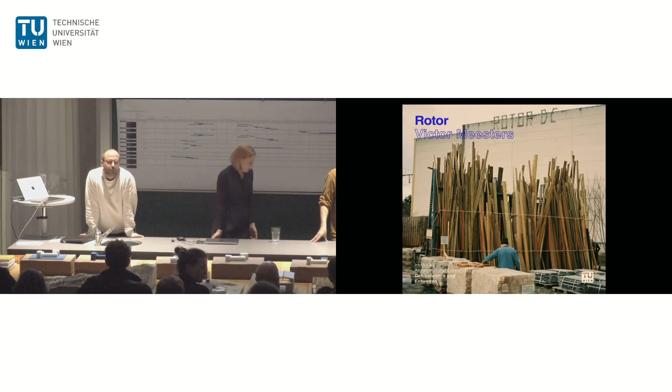Thank you for your very interesting input. I would like to ask if you reflected, or how do you look today back on your project in Burundi regarding discourse on decolonialism?

Very good question. For me it's a real struggle, because we did this project, and if you ask me, do you want to do it tomorrow, I would say no, that's for sure, because for a young male architect going to Burundi thinking that they will do something, it looks wrong.

I have this feeling also, but at the same way I feel a bit in a dual thing, because I really have the feeling that we learned so much by doing this project, so much from the people there, so much from doing stuff there, failing also, doing it again. That became the base of a lot of work, of concept and practice, of how we practice architecture now. It was so meaningful for me and my colleagues that I don't have a straight answer.

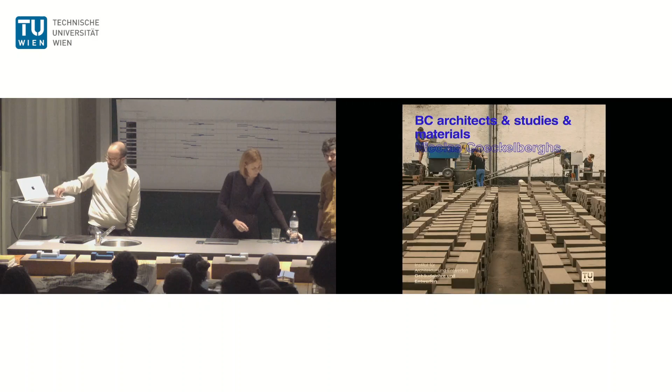Oh yeah, if it's okay, I would just have a question for Victor regarding establishing these reuse strategies in the mainstream. My question would be, what's your experience in...

Reusing, like for example, these tiles and windows that you showed in your example, regarding the problems we discussed before with how in a country where labor is so expensive—how does it compare to put out all of these materials, which seems like a more or less labor-intensive task, regarding the monetary expense of doing this, and also the CO2 expense of bringing it maybe to another facility to treat these different materials? So how does it compare against using new materials?

If you want circular economy, you need to accept the criteria of this circular economy. It's not cheaper than new materials, except if you are unemployed and have time, or have time for yourself. Circular economy is often more labor-intensive work, and that's why it's good also—so it's not an argument that it's cheaper compared to new.

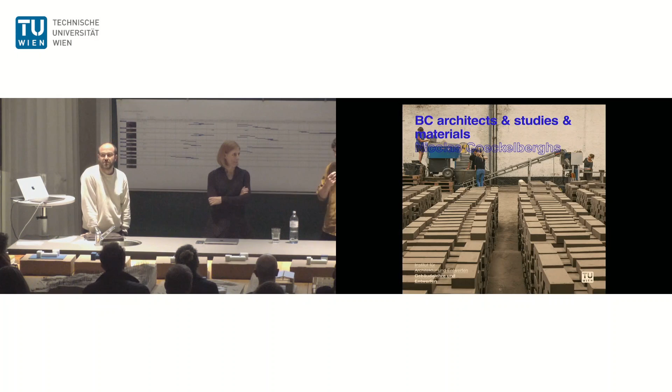But what can you compare as new materials? If you take cobblestones, a pavement from Belgium, the new one costs 80 euros per square meter. The reclaimed one from Belgium is 60 euros per square meter, less. But the new one from India is 40 euros per square meter.

So it's cheaper than the local one, but more expensive than one produced in India, and maybe there are children working in the quarry that extracts this cobblestone. So the question is how to compare new with second-hand materials, and to accept the question of what type of economy you want. If you want circular economy, it's that type of way of working—you need flexibility, you don't have a large quantity of materials.

We always say the city is an open-air quarry for salvaging, but it's not a quarry, because a quarry is when you have land, you make a hole, and with a machine you extract a stream of elements and produce like industrial production. Reclaiming building elements is closer to mushroom collecting in the forest, you know.

You need access—if you want like 1,000 square meters of ceramic tile, you need to access maybe 5 buildings, so 5 different owners. You don't have visibility of these 5 buildings, what's inside. They're going to be all different sizes, different colors, different ways of joining. Then you need to reunify this batch and mix them to create the amount of tiles you want.

So circular economy is there—we know that's how it works, that side. If you want this type of economy, you need to work with that. But it's dangerous to try to massify or make this circular economy the same as a linear, industrial economy, because it's nonsense.

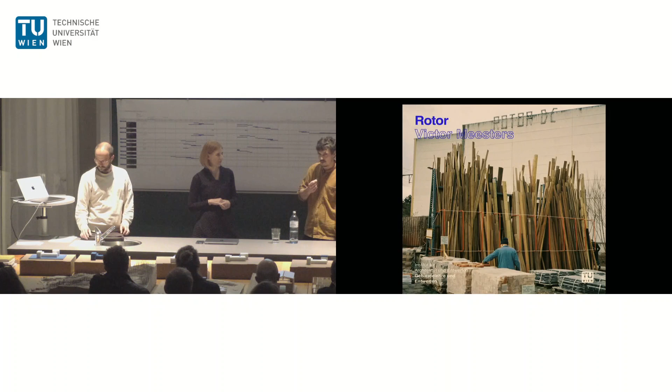So maybe when you want to build an 80,000 square meter office building, maybe we don't need to build it anymore, or you need to deal with what is already there and put your building in another one. But we won't be able to give you 80,000 square meters of fake ceiling or stuff, because it's too large and it's made with this industrial economy. So again, the question is about which type of economy, and take it as it is if you want to work with it.

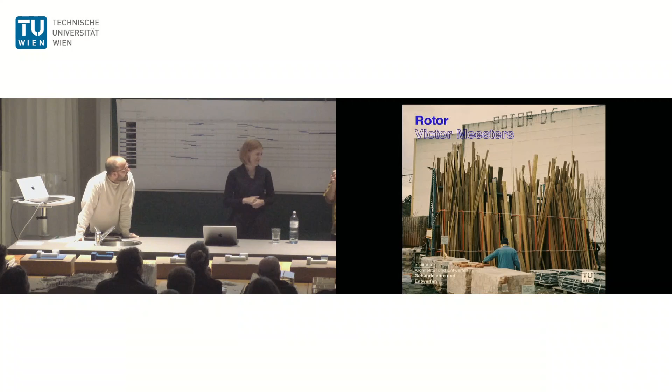Thank you. So I won't ask you a question again, but I will share a few things I shared with the students. I was really impressed by the work of the students this morning, and a lot of studios are working with this question of reusing building elements, what's already there, and everybody is struggling. Again, it's because you crossed the line in the other sense, so it's normal. It's the first step, but it's going to become easier.

The thing is, if you want to, architecture is really simple. It's like making holes somewhere and putting a pile of material, organizing this pile somewhere. And if you want to stop making holes, you can explore this question of reclaiming building materials. The good thing about it is it's a dynamic architecture still, because you circulate the materials. So it's kind of an enthusiastic approach to rediscovering architecture.

I think what is really missing, and what I encourage you to do, is to explore the tools. You need to change your tools of designing when you change your practice. So think about other fields of research, in archaeology, in preservation and heritage, in I don't know which other science, but we need to develop these tools to show new information that we want to manipulate, and it's going to be much easier. So this is an invitation to be close to the context. It's always a tailor-made, contextual question, so develop your tools, think about this to make it easier.